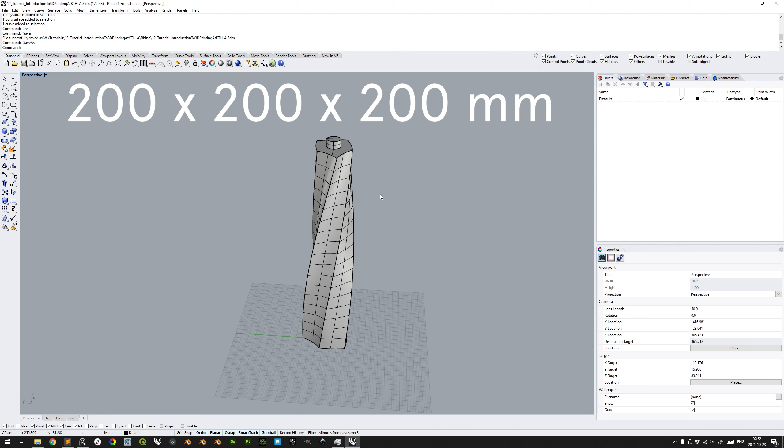So if you select your intended geometry to print and you type BoundingBox, you see here that this particular model is in meter units, and it's 35 times 35 times 152 meters in dimensions. So this particular model would only be suitable to 3D print in a scale of 1 to 1000 or even

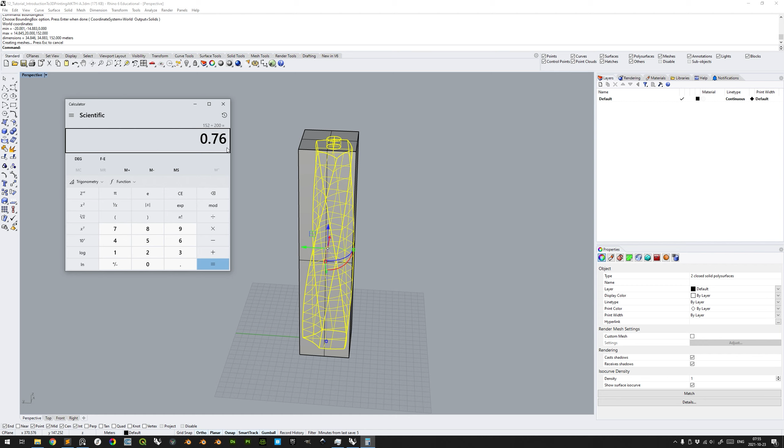smaller. Of course, you could max out the maximum dimensions and fabricate a 200 mm high model in a scale of 1 to 760, but that's not a very standard scale. So take into account the maximum dimensions possible to fabricate with the 3D printers at KTH Architecture School workshop, 200 times 200 times 200 millimeters. Alright, we'll delete this bounding box.

It is important to deliver the actual file to be 3D printed in a millimeter unit file document in the intended scale of fabrication, and thus one could recommend to save the file as a separate file. So let's see here, and this will be in 1 to 1000 and in millimeter units. Very good, let's save it. Okay, now we can make significant changes to the model without having to worry about altering the original one.

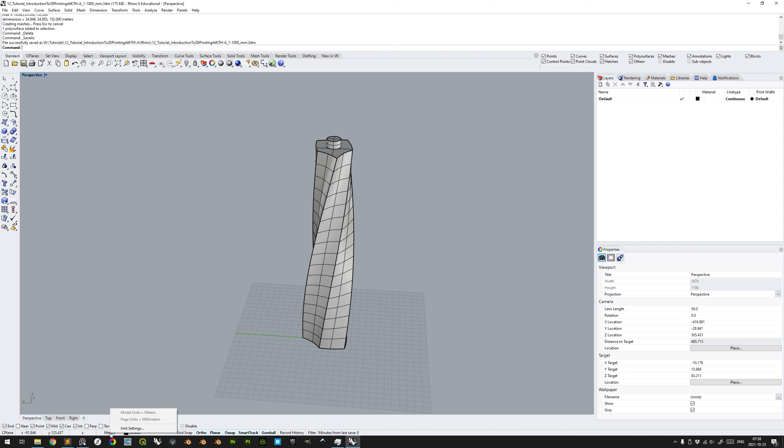Alright, so the first thing we can do is to change the units from meter to millimeter, going to unit settings here. And then since the intended scale of fabrication would be 1 to 1000 in this particular case, we could simply keep the geometry unscaled when changing units from meters to millimeters, since changing units here would incur a change in scale of 1000, and then we would scale down with 1000, so that would be the same. But since this is only applicable in the 1 to 1000 scale use case, we will show now for any use case.

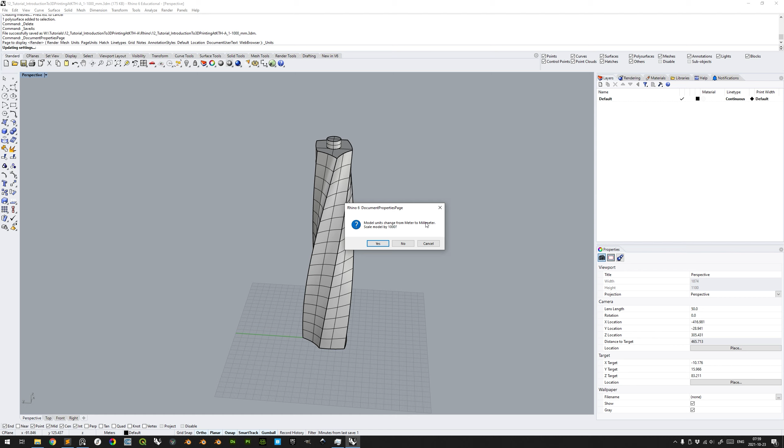So change it to millimeters, click OK, and scale the model by 1000, since that is the factor change from meters to millimeters. Yes. Alright, and as you see, it was significantly scaled upwards. Already at this point, we can simply Ctrl A to select everything, and then we could of course ZS to zoom to selected. Alright, here we have our model, but we would not actually need to have done that.

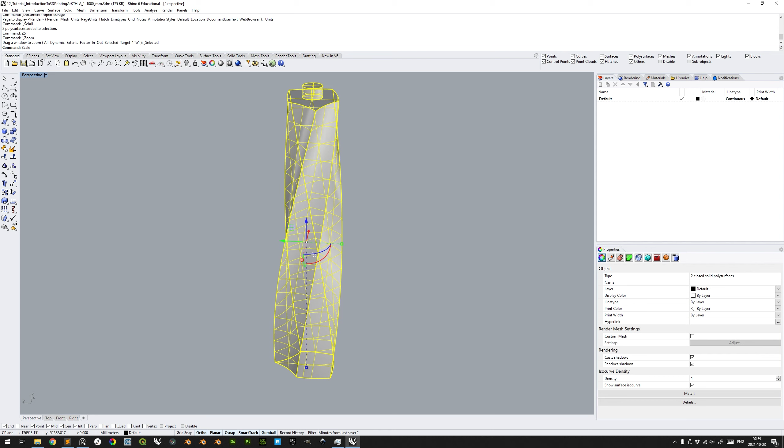We could simply scale with everything selected, type the command Scale, and the base point should be the origin, most easily input by simply a single 0. And the scale factor should be 1 divided by 1000, or 0.001. Enter to confirm. And then we can ZS to zoom to selected again.

Now when we type the command BoundingBox, we should see here that the bounding box dimensions are now in millimeters, and it's about 35 times 35 times 152 millimeters. So in a scale of 1 to 1000, this model could be fabricated with the 3D printers at KTH Architecture School workshop. Alright, I'll simply undo this command with Ctrl Z.

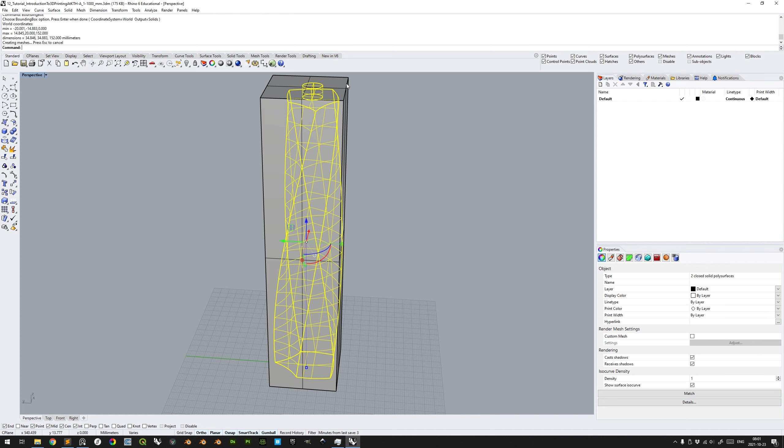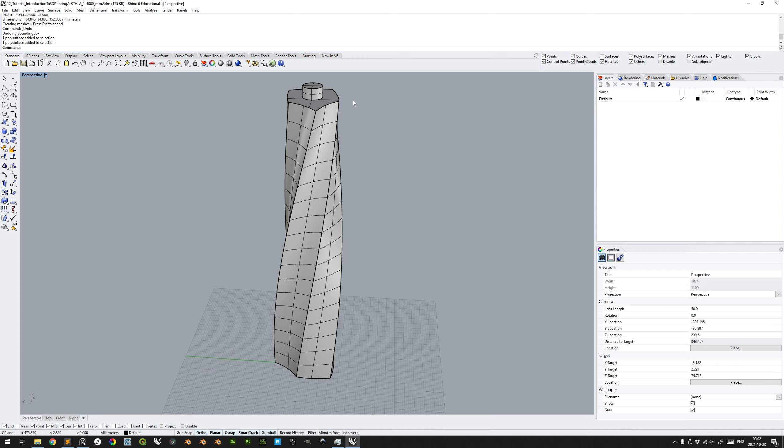Your original model might rely on separate geometries for separate material handling, but the model that you should export and deliver to Henrik in the architecture workshop should be delivered as one file, one object, and it should be closed. So in this particular case, we already have 2 closed solid polysurfaces, but we should select both of these and BooleanUnion these. Very good. The reason for this is to allow the Ultimaker Cura software to make the most efficient slicing of the model.

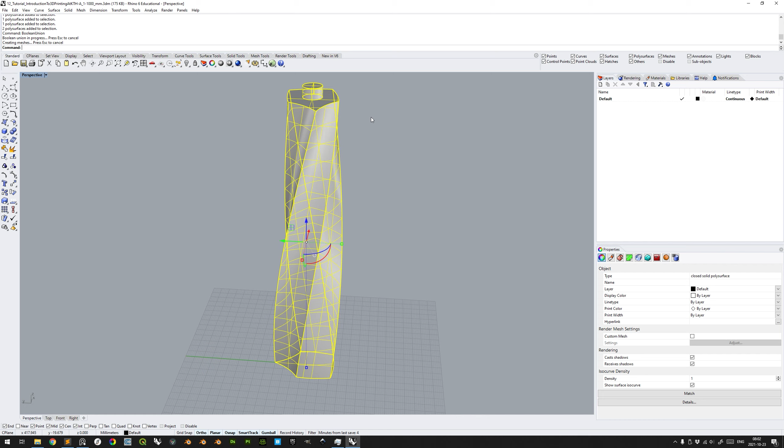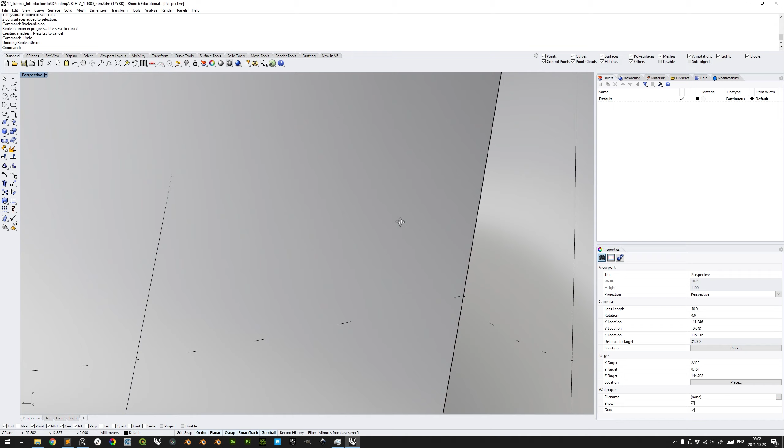And if we zoom in here and go inside of the model, here is the BooleanUnion state of affairs, but if we undo this, and press Escape to deselect it as well, you see here that we have an exterior surface that is co-aligned to an interior surface, and this might be a problem for the Ultimaker Cura software to efficiently slice, even though it would be no problem as long as the tolerance is suitable enough.

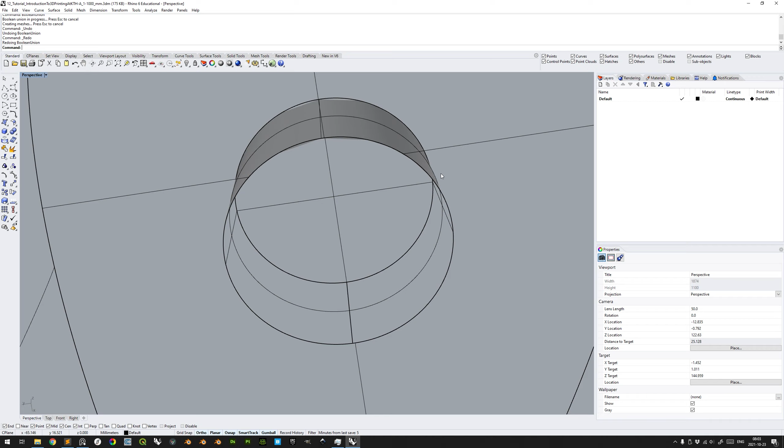But I'll redo that command with Ctrl Y, and now you see here that we have no exterior surfaces co-aligned to any interior surface. Alright, as previously stated, this should be a closed solid polysurface. It can also be a mesh, but then the same restriction applies. It must be a closed mesh.

So if one would type mesh here to make this a mesh, and if one would select that last generated geometry, then you see here that this is a closed mesh. If you would explode this, then you see that there are 9 open meshes, and this would not be able to be even processed by Ultimaker Cura, the software used in the architecture workshop to slice the models for 3D printing. So they should be closed.

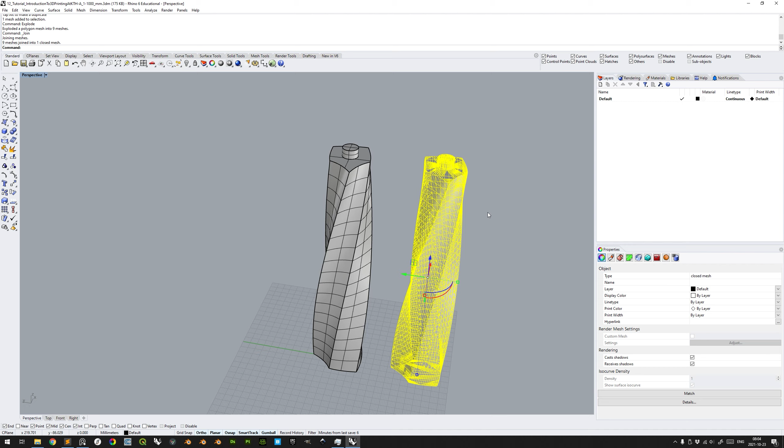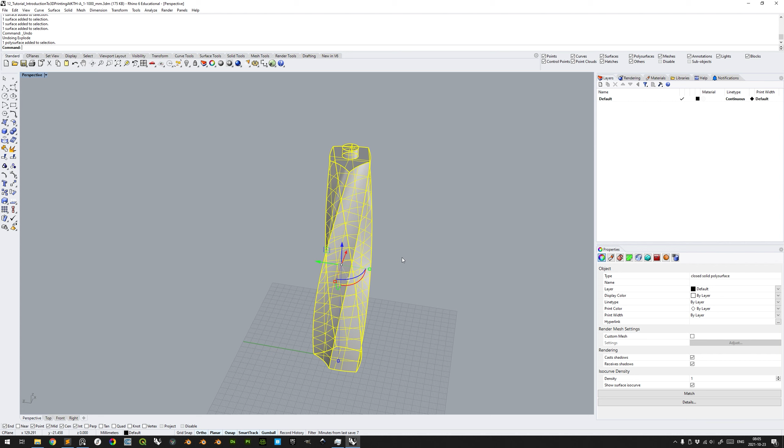If I join these meshes, it's one closed mesh. Very good. The same thing applies here for the BREP surfaces. They should be a closed solid polysurface. When we export to the STL format, any BREP surfaces, any surface geometries will actually be converted into mesh geometry, but you can use BREP geometries and then it will be automatically converted to STL mesh when exporting.

The 3D printers used for fabrication at the KTH Architecture School workshop can handle overhangs, that is when a portion of the geometry is situated above void. You see that there's an overhang here. The overlying geometry extends beyond the underlying geometry. And the 3D printers can handle up to about 50 degrees of overhang, significantly more than the overhang we have here, without having to generate supports for the overhang geometry.

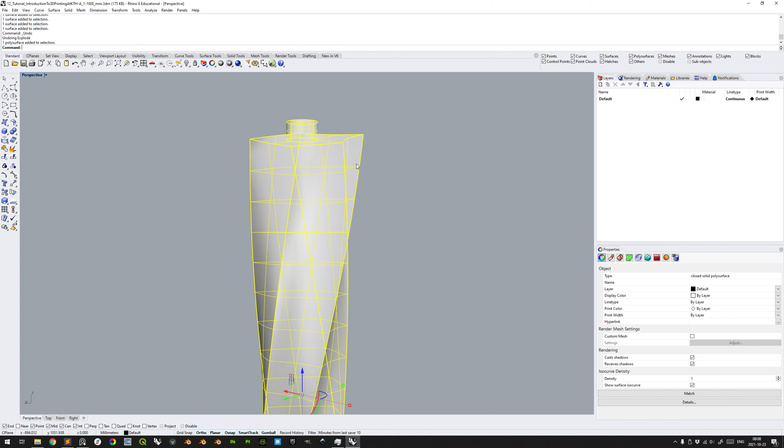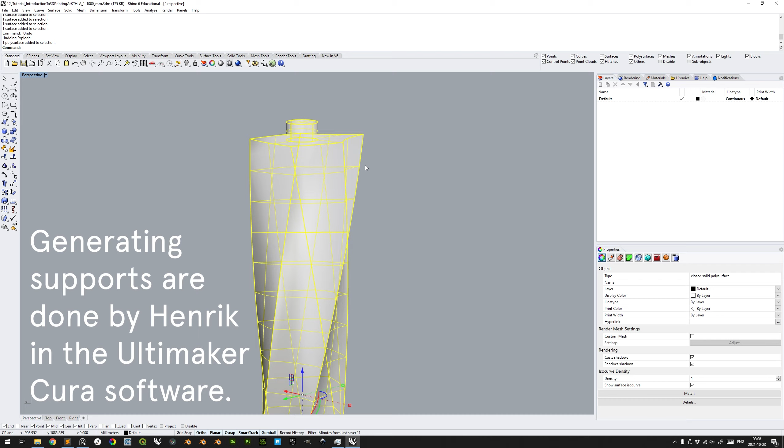But if you have a geometry or a portion of it that extends in a much more protruding angle, then you will need to generate supports. And generating supports is no problem at all. One only has to be aware that if the 3D printer is to print not only the model but also support geometry as well, then that will incur an addition in the time it takes to print, as well as an increase in material cost.

If you have several objects that you want to 3D print, it is very important that you export these objects one per each separate file. So if you would have as well here a small box, then it is important to export these 2 separate closed objects separately. When exporting multiple objects separately, it is no problem if the additional geometry is situated in another position than centered around the origin. As long as you export the different geometries separately, Ultimaker Cura imports them in a way which allows Henrik to place them individually and correctly on the printing bed. But remember to export separate objects separately.

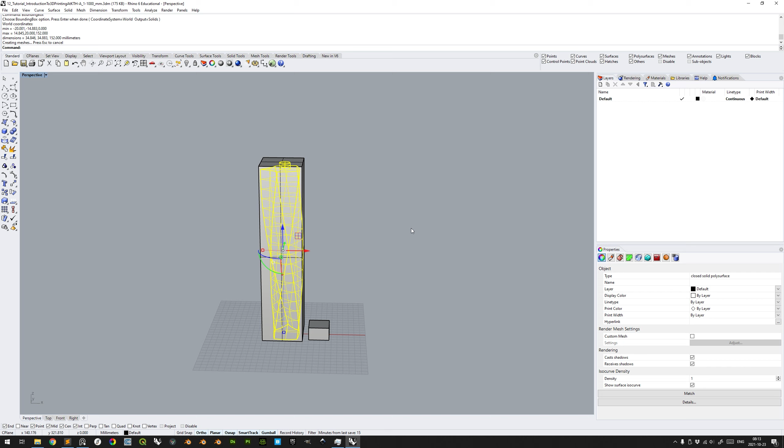Alright, to export the intended object for fabrication as an STL file, you simply click on the object, make sure that it's a closed solid polysurface or a closed mesh. If you haven't already, make sure with the bounding box command that it's less than 200 times 200 times 200 millimeters, the maximum dimensions of the 3D printer. I'll undo that. With it selected, simply type export. This is the same command as one would otherwise click File and Export Selected.

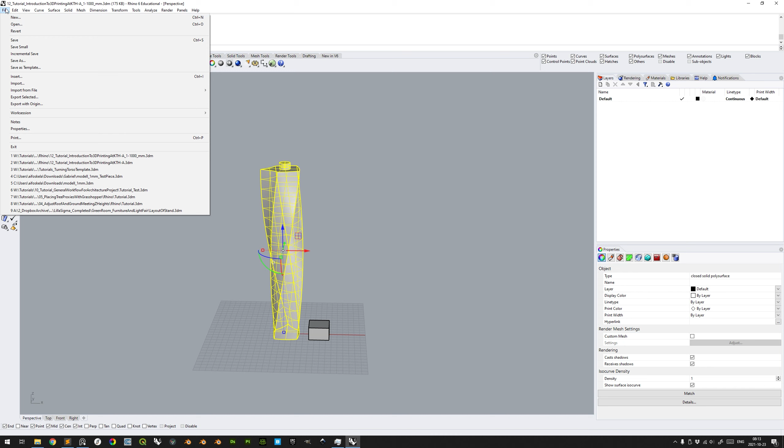Alright, export. And here you will export it as an STL file, a stereolithography file. So scroll down here to stereolithography, STL. And then to make it easy to overview for Henrik, you can save it as your name and then some sort of signifier for your project, tutorial in this case. And then, just to make sure that the scale is imported correctly, I usually take note of the height of the model, which is 152 millimeters.

And then when Henrik imports it into Ultimaker Cura, you can immediately see if it was imported as 152 millimeters in height, or as 152 meters in height, which of course would not be possible to fabricate anyway, but just to make it easily verifiable that the scale is correct.

Alright, for the options here, you want to have it as a binary file. It is simply smaller in file size. And here you also see that by default open objects are not even exported, so make sure beforehand that all the objects are closed, otherwise they will not be able to be sliced in Ultimaker Cura. Okay, and then save.

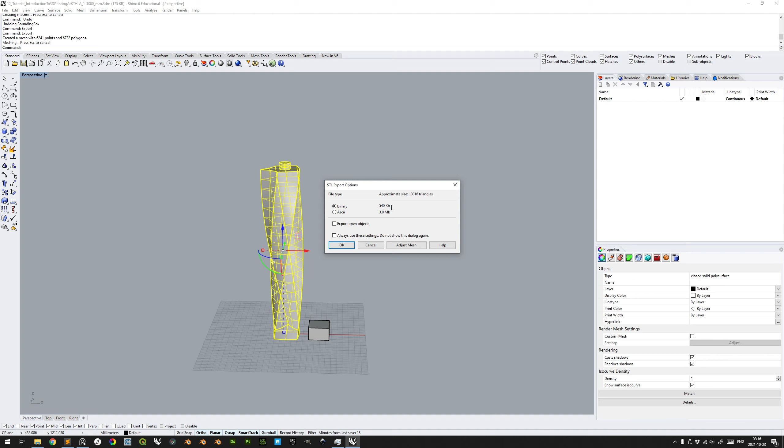And then the tolerance, 0.01 millimeters as a default, is adequate. So we can click OK. This is the tolerance for the generation of the mesh that will be created for the stereolithography file. OK. And then you see here an approximation of the size that it will be, a very small file in this case. Click OK. And now it is exported.

If you had several objects that you intend to fabricate with the 3D printer, you simply repeat the process for those additional objects. So selecting that, export, then we can click that one to get that name, but then change it, of course, so as not to overwrite it. And then this is the box, and it was, I think, 11.3 millimeters.

And generally, one should avoid decimal points in the file name, but in most cases it is only the file suffix, the last characters after the last point, that will be interpreted. But one can also make sure to simply replace it with an underscore here. All right, and for the options, yes, it's the same. Okay, save, and okay, and okay. Very good. Now we have those two.

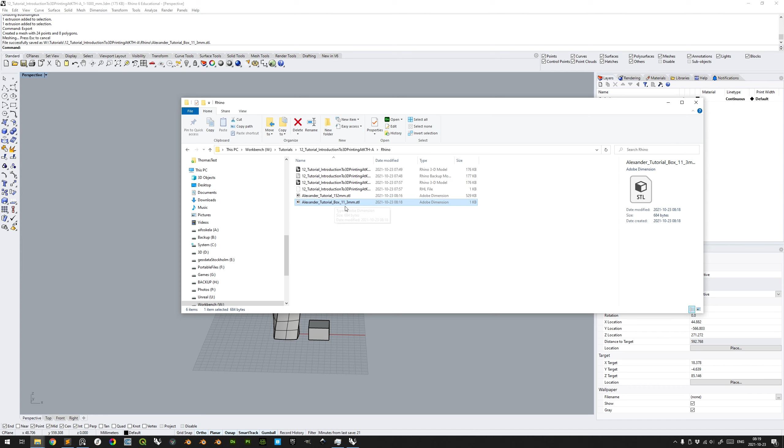Then to easily go here, we can simply copy that directory there and go to File Explorer, and here we are in the exported directory, and here we have these two files. And since this one was only used for demonstration, I will delete this. This is the one that we were interested in.

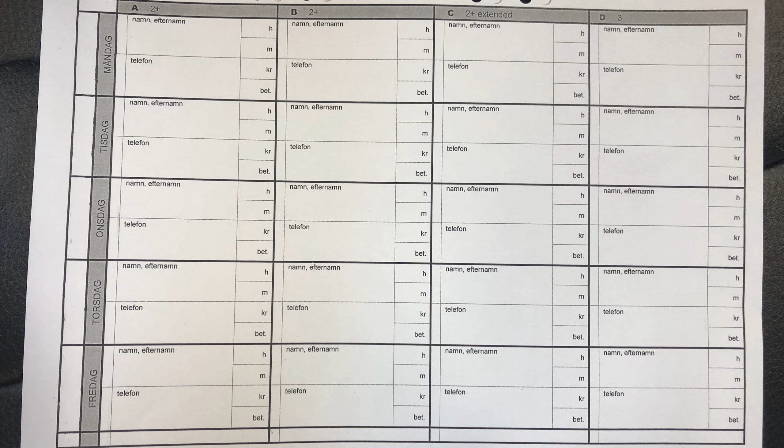And given that the model is adequately prepared, you can visit the architecture workshop on site to make an actual booking with Henrik. And when you make a booking, you write down your name and your telephone number so that you can be easily reached should a problem occur. And if you have not decided upon anything else during booking, it's important to be on site on the date of the actual 3D printing no later than 10 AM. Otherwise your booking will expire and someone else might be prioritized.

The student pays for the material cost to fabricate your model with the 3D printer, as well as a 50 krona fee per booking. The material cost starts at about 3 krona 42 öre per meter, so that of course depends upon how large your model is, but the 50 krona fee is fixed per booking. If it turns out to be a very long print, they are preferably run over the weekend, starting Friday after lunch.

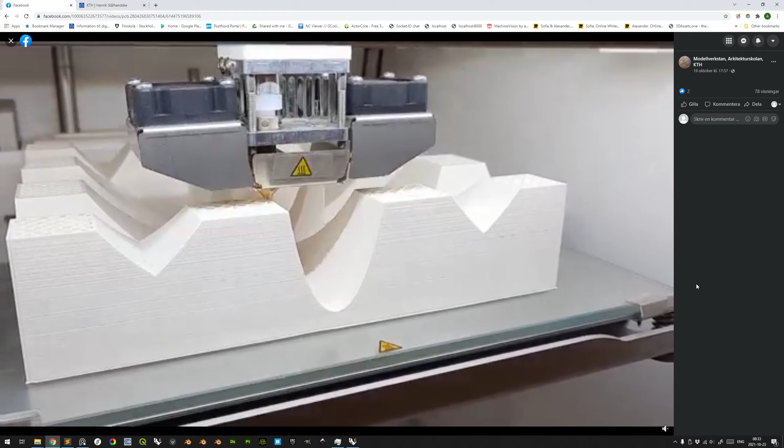You will know already at the moment of booking how much your print is going to cost, including the booking fee. But it is generally paid after the print has been completed, so that you would not have to require a refund if any initial problems occur. Thus, you usually pay after the print has been fully completed. The price might vary significantly depending on the model that you are 3D printing, as well as inclusion or exclusion of vertical supports. But as an example, this model here cost 211 krona to fabricate, but that's just a reference. Your mileage may vary.